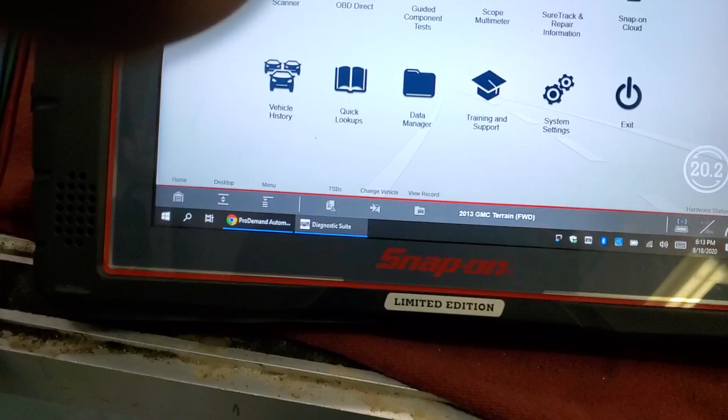Let's go ahead and get into scope. 4-channel, we got all our leads in. All our grounds are stacked. The other side is grounded to a jumper wire to the negative.

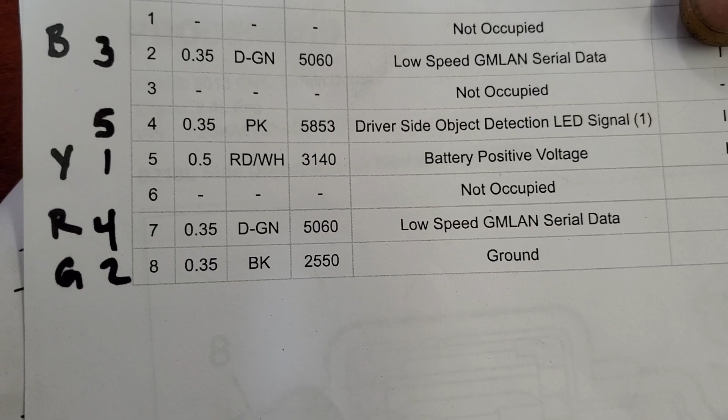So we're going to set this up. Yellow is going to be our battery positive voltage. Green will be ground, and blue will be low speed can, high or low, doesn't really matter, and then the red trace will be the other low speed can.

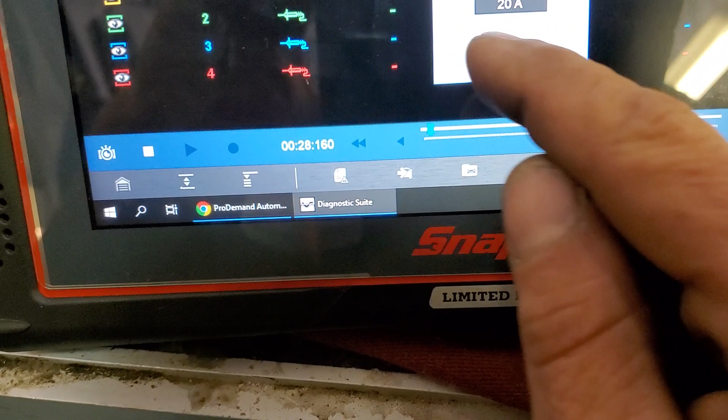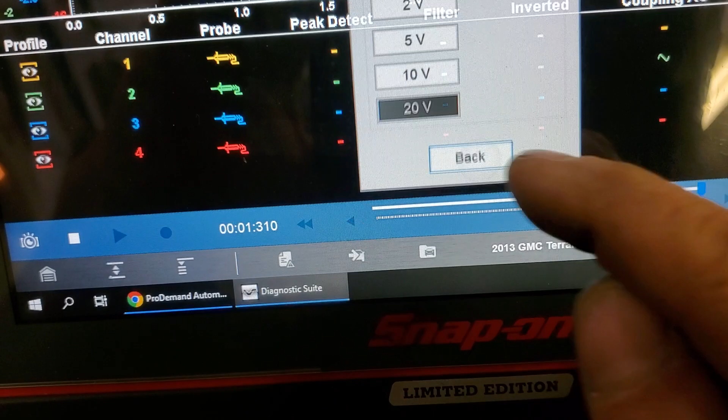So let me hook these up. We're going to want to change our probes all to volts DC. We're going to go to a 5 millisecond screen, scale 20 volts, 10 volts, we'll go 20 volts on all of them to start. 5 millisecond screen. Alright, let me hook them up.

Keys on, engines off. You can see all the numbers - now that's why I number them. So I'm just going to hook up all my leads.

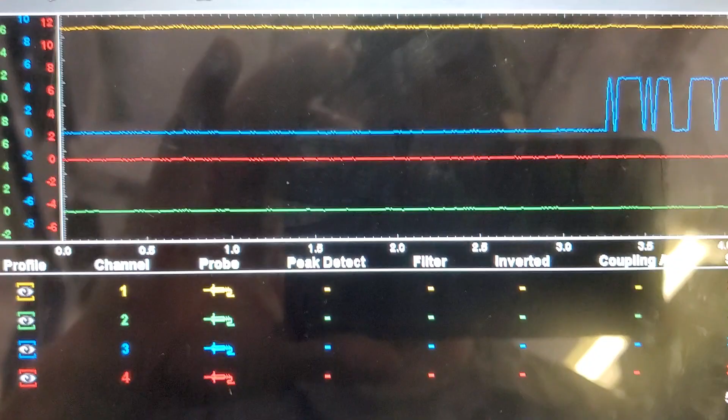Alright, to get the vehicle running, and you're going to see that blue, which is our low speed serial data, has got a signal, but our red, which is our other one for the low speed, we got no signal, and we're unplugged right now. Ground is at 0 volts.

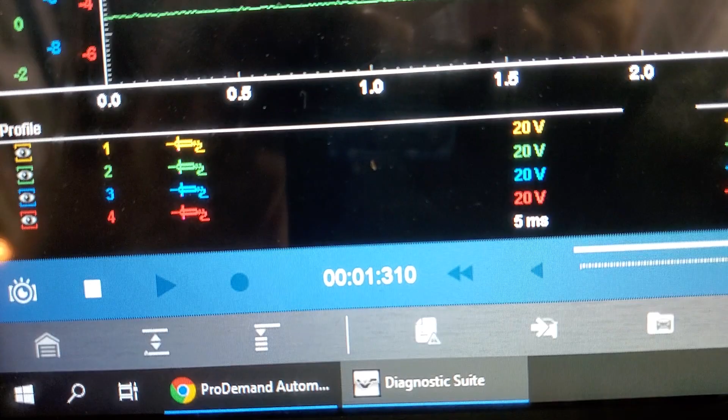If we want to look at voltage, you'll see that ground is at about 40 millivolts. Our battery feed is at 14.7, 14.8, and then our red trace is fixed low.

So we have no - now if you look, let me pause this. We've got a 0 to 5 volt CAN signal, low speed CAN signal, but nothing on the red. And I'm unplugged, so let me plug it in.

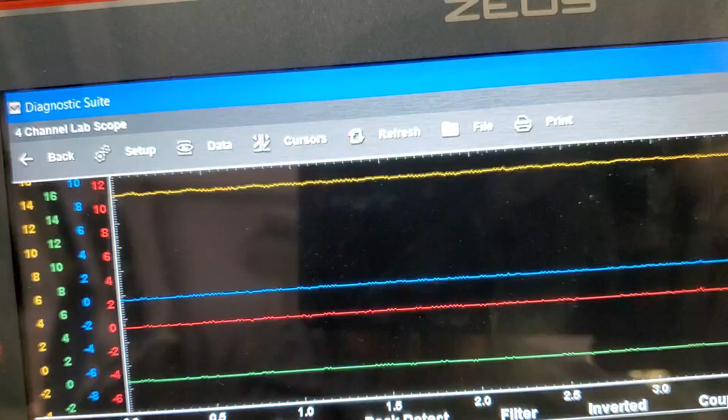Alright, plugged in. Now you can see with it plugged in, the red is 0 to 5, and it mimics the other one.

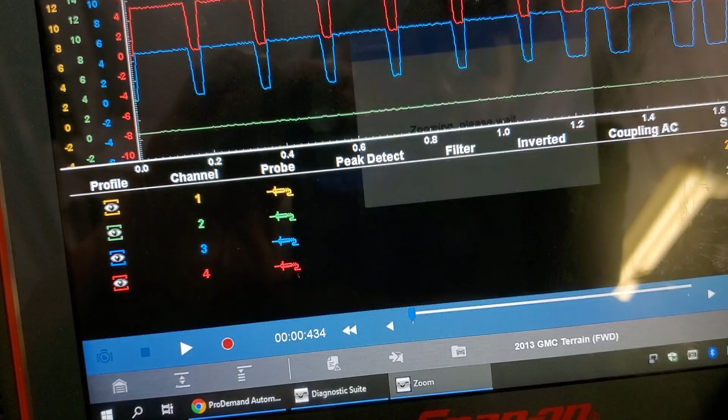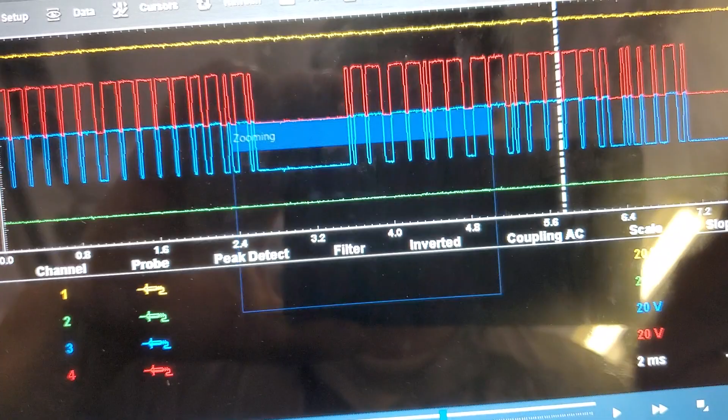Now if I want detail on this, we can drop her down to a 2 millisecond screen, hit stop, and then zoom. And wherever this dotted line is on the waveform is where it'll zoom in, okay? So if I want to zoom in over here, okay? So you can see they mimic one another.

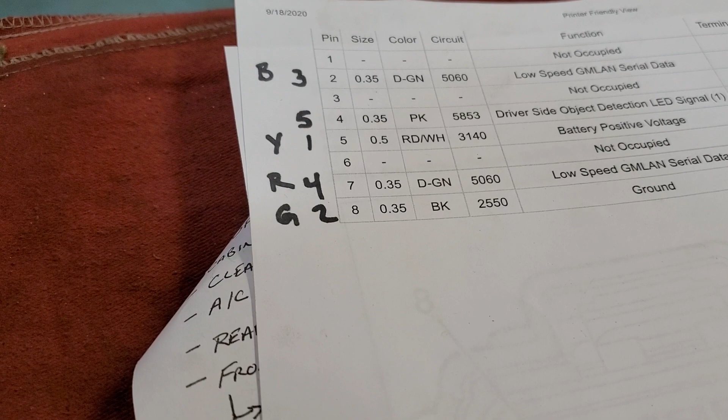So the red must be the communication line back from the module, I'd imagine. Yeah, I'm gonna have to look at that a little closer. So let's look at - where'd my wiring diagram go?

Alright guys, this makes sense now. We're on this one, this is our red trace. It's dark green on pin 7. I have no signal unplugged, but I have a signal plugged in. Now,

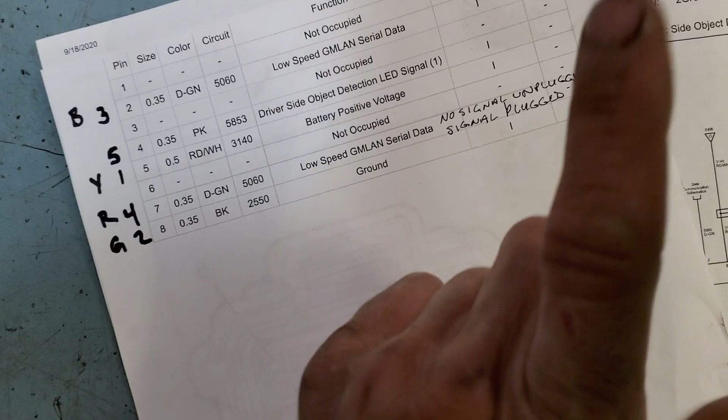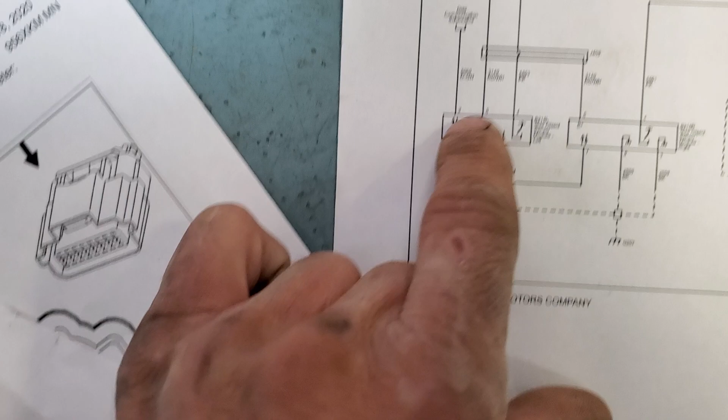if you look at the wiring diagram, you'll see them two-way arrows. This right module, the right module they talk back and forth, okay, between the left and the right, and then the left one is responsible for sending out the signal.

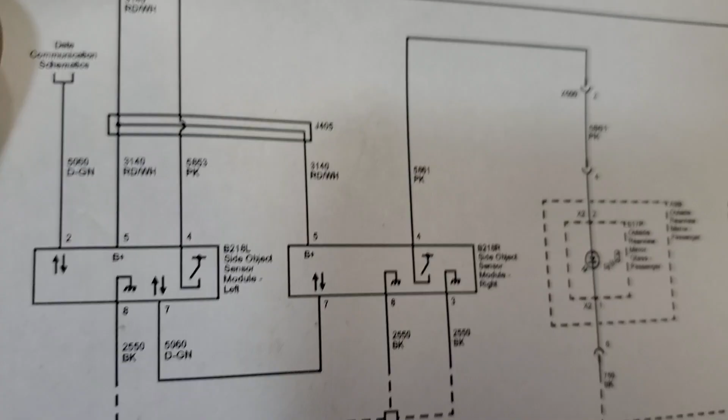Interesting. So that is very interesting. So I'm going to unplug the right side module and see what happens. Okay, right side's unplugged.

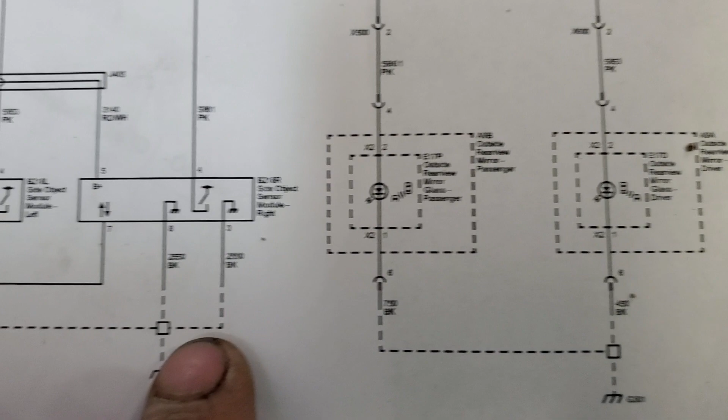So let's look at this again. So if I unplug this side, it means I should have no comm for my right module. And I have no ground to it, I have no power to it on the red-white. No signal from that pink, for the mirror, it's not communicating with the left one.

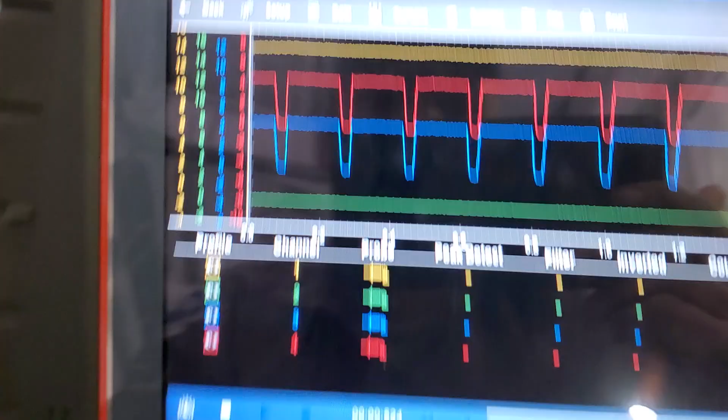So we're still plugged in on our left. Okay, so the left is the one creating those signals. Now let's disconnect it, the left one.

So the red trace is the signal. Again, red is this one. This module, the left one is talking. The right one is not.

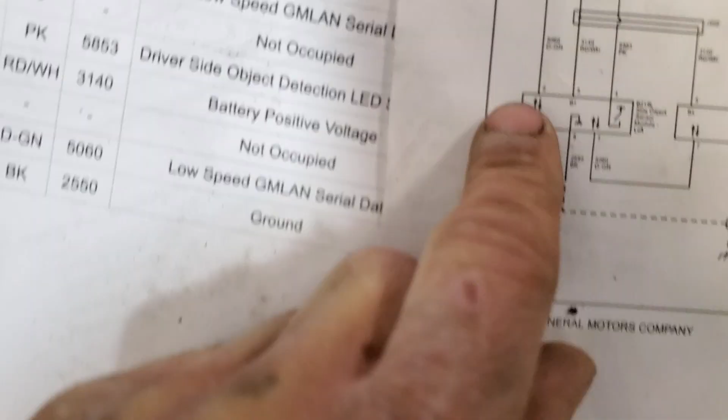Because if I plug the right one back in, I should have a signal, you would think, right? And I've got a signal on the network. That's this one. I've got signal coming out.

That goes to the communication network, so we'd have to pull the schematic. But if I plug in the right one, and we're disconnected here, and this is a two-way street, you would sure as hell think my red one should have a signal on it, right?

No. There it came back. So maybe I wasn't making a good connection before, so okay, there, it stopped communicating. It communicated as soon as I plugged it in, and then it shut itself down. I wonder if that's because there's a fault.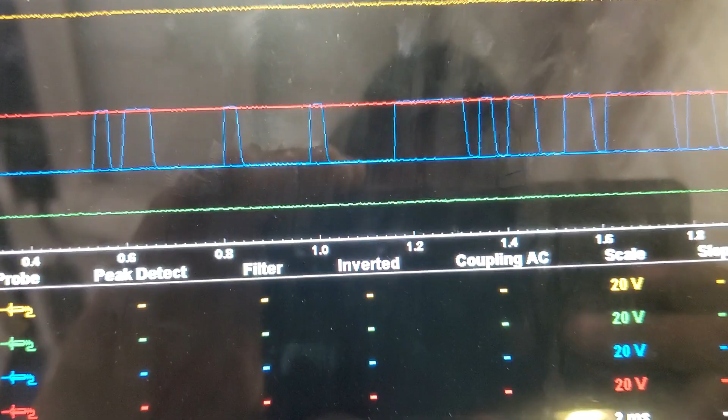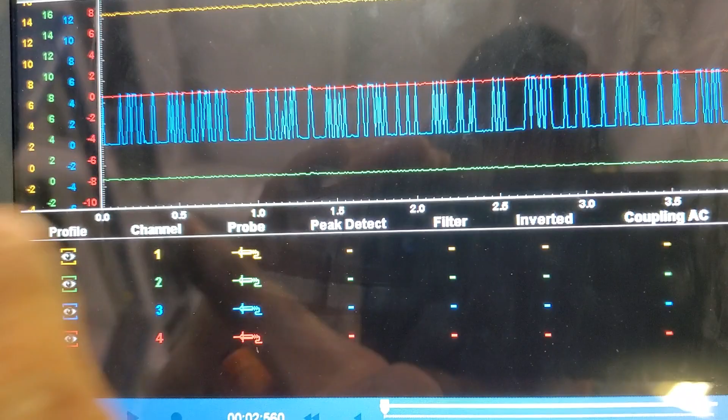Let me increase this time base so we can see more. There. So now we can see this is the network. Again, we're tied in on the right side, but we're unplugged from the left sensor or module. So let me unplug and replug in the right.

Alright guys, I got it unplugged right now. Now watch when I plug it in. Again, we're on the right module with the left one unplugged. Watch the red trace, I'm gonna plug it in.

Remember, we weren't getting codes for the right one. Here we go, come on. Oh, this is hard to do. There we go, there it is. Signal.

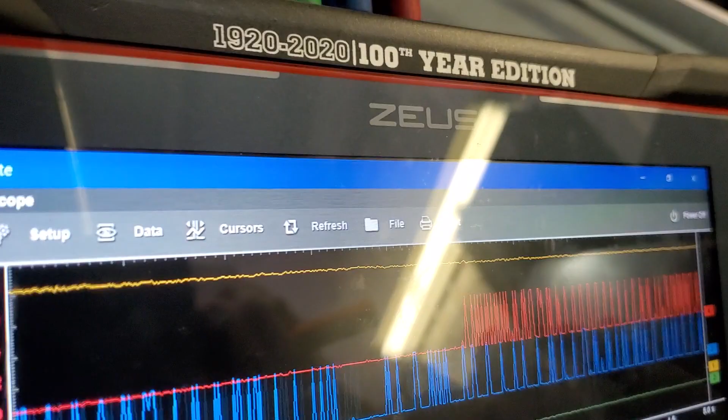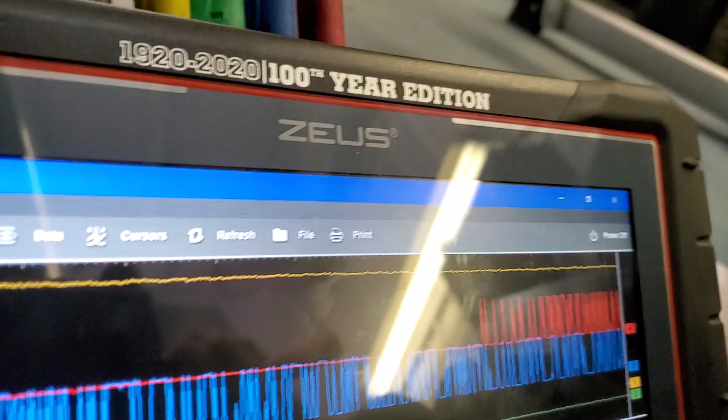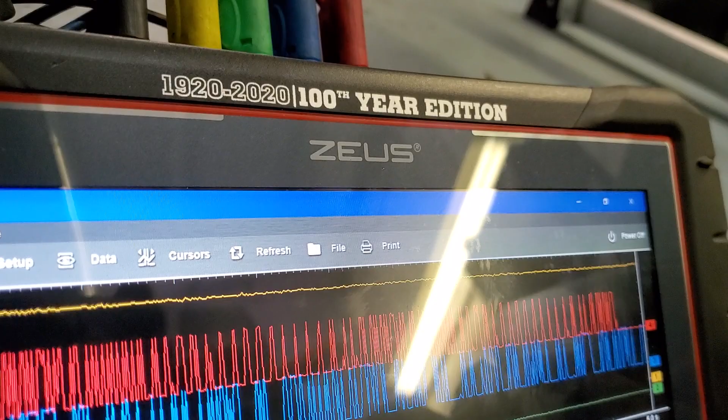Unplugged. Plugged in. No, let's watch it. So, there you go, I don't know what it just did, but again, the right side is our known good. Now let's watch the left one.

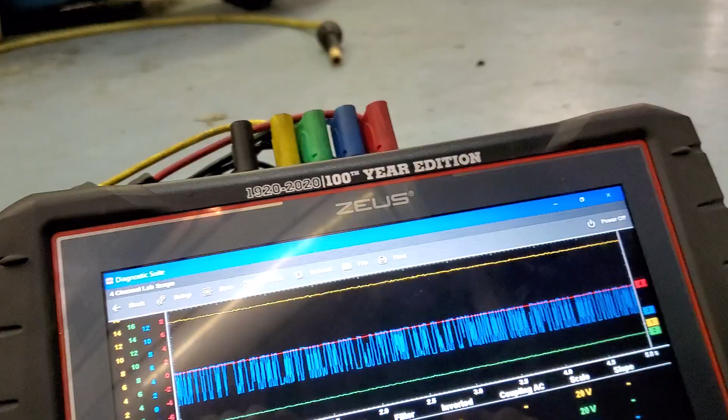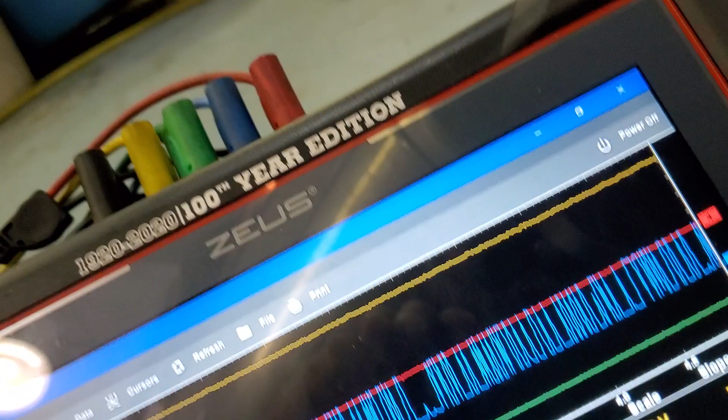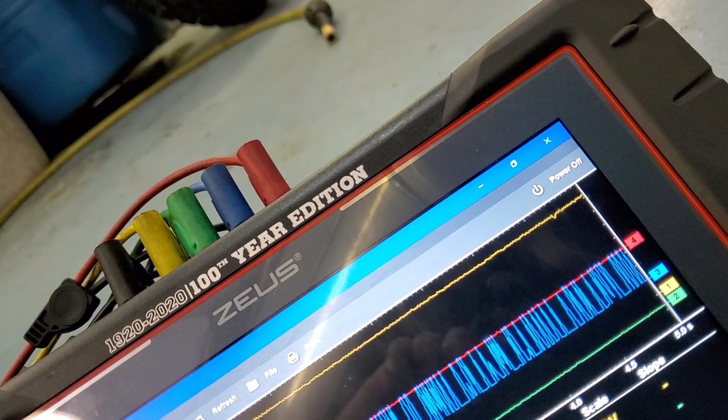Now, I would assume they should be the same. Okay, here we go. Let's see if I can get a hold of it. Oh, come on. Okay, yeah, we're unplugged. So I'm going to plug it in, and it should do the same thing the right one did: talk for a little bit and then stop talking. I don't know if that's like a health check.

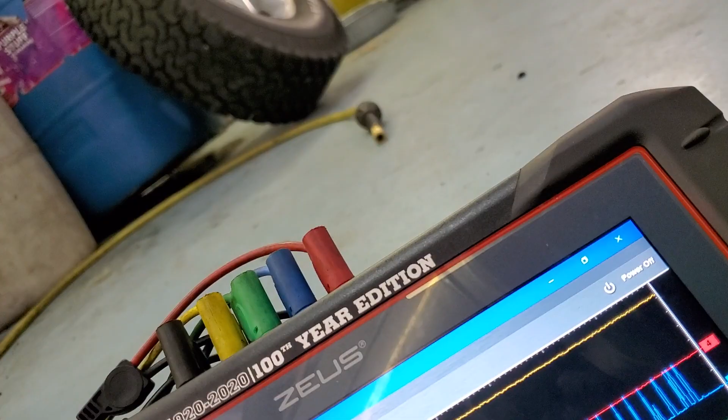Ignore that power feed that just dropped out on the yellow. That was me just bumping the lead. Oh my goodness. Hold on. Oh, this is freaking hard, guys. Ugh. I can barely reach it. Oh, come on. Come on. There. Alright. It's plugged in.

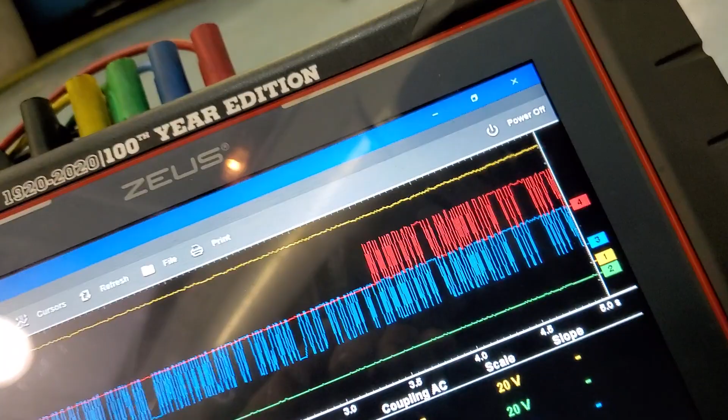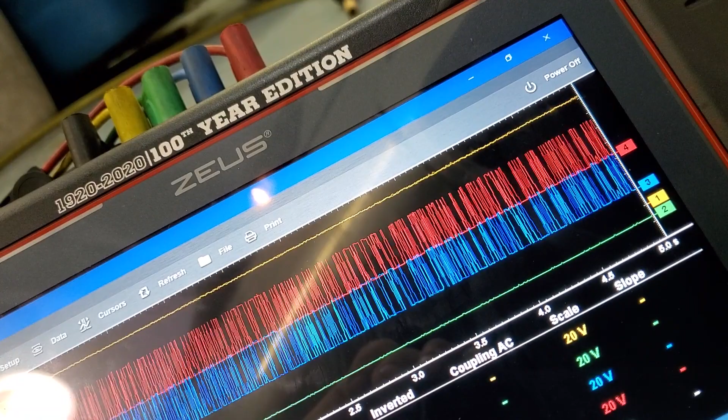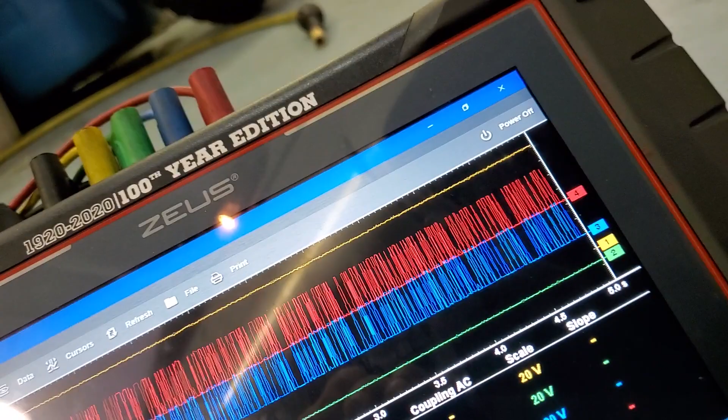Let's watch it. I don't know how long the other one took, but it didn't take very long, and it stopped communicating on the red. And there you go. Not acting the same way. I don't know. Maybe that's its way of saying, hey, I'm alive, I'm good. And then when it goes low and just stays low, it means it's good. And then when it has problems, it starts talking about it. Because you can see it's still talking, and it's mimicking the network.

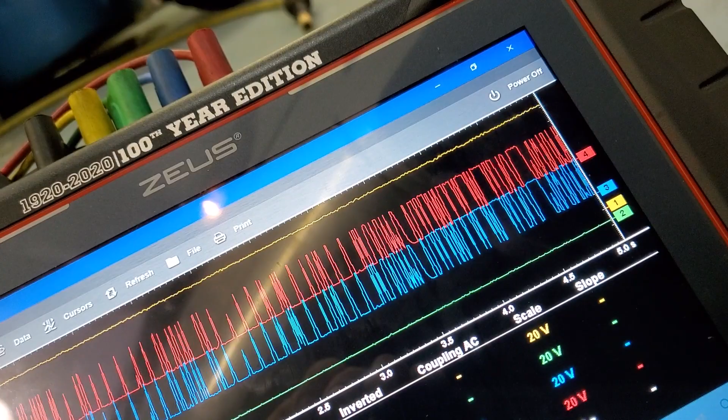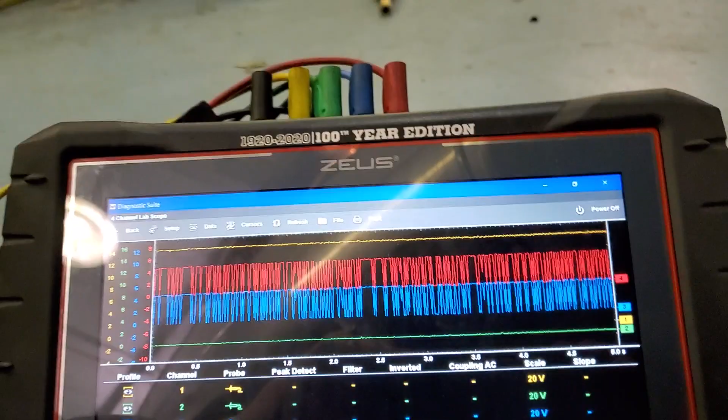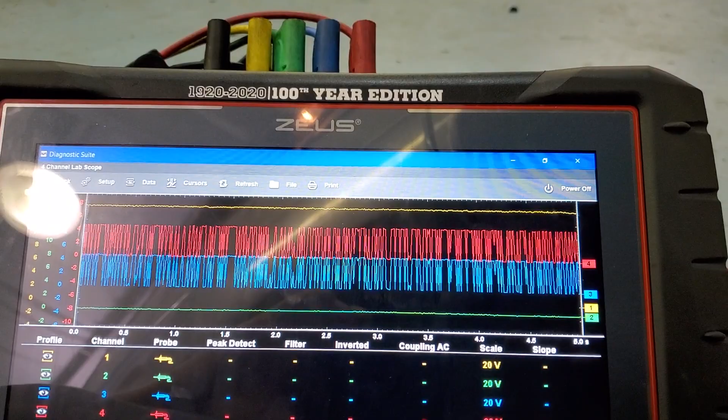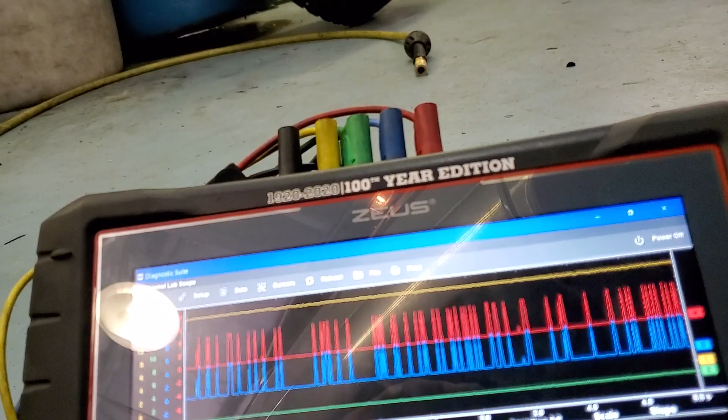Okay, so we're pretty much done, guys, but I'm gonna load test this. I'm gonna do a voltage drop test on the ground and on the power at the module here with my meter, and we're just gonna hook one side of the meter to battery positive and the other side to the positive piercing probe that we have in there. Same thing for the ground. We'll go ground to ground and just read our difference, and we're pretty much done, guys. I want to check that.

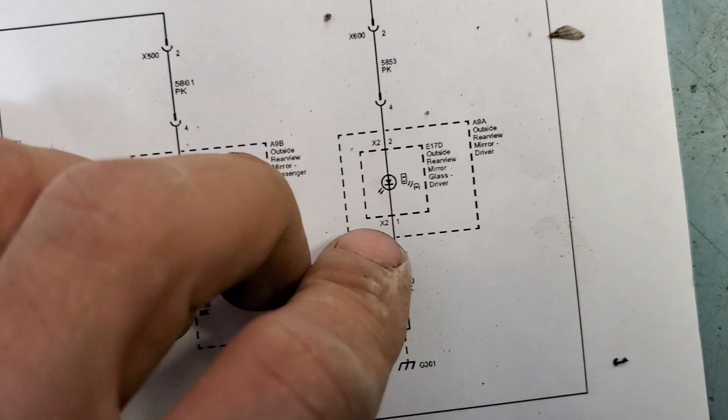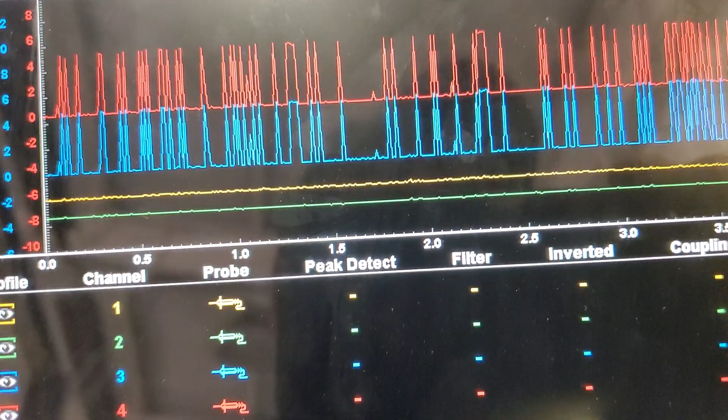I want to check this pink. I don't know. That must be the signal to the outside rear view mirror. Okay, so that's the signal to the mirror. So let's check that. Let's put the yellow trace on that real quick. All right, yellow trace is on. Now I don't know what that is supposed to look like, so let me go do something to see if we can see a change.

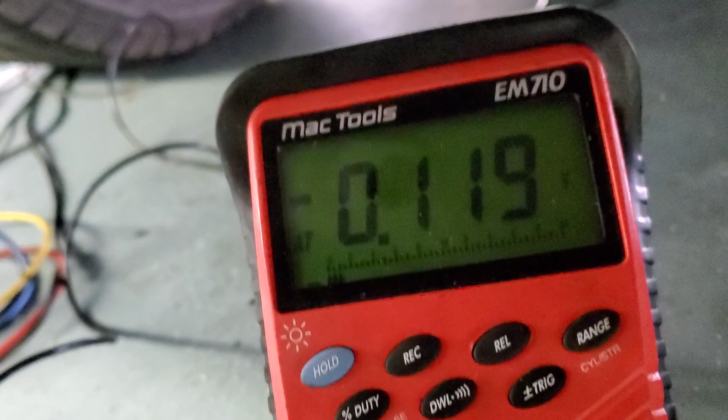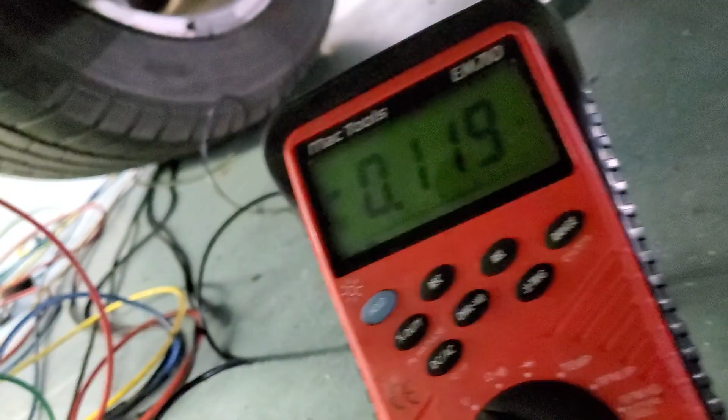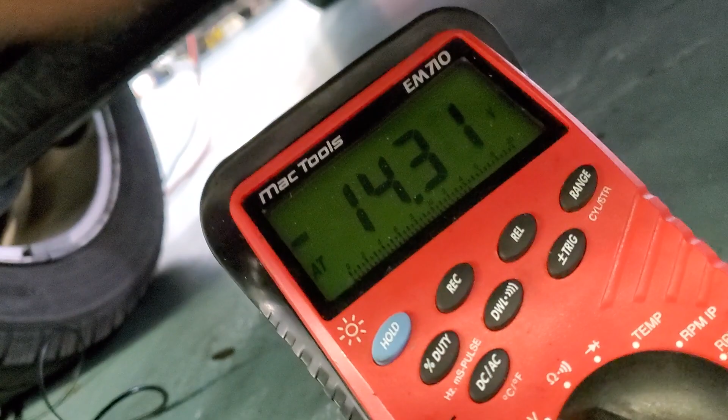All right, I'm on the left module. It's plugged in and we're running, and I'm doing a voltage drop on the power feed. So 119 millivolts on the voltage drop on the power feed to the left module. Not worried about it. Let's do the ground quick. Alright, I'm hooked to the ground, and you can see we're getting about 14.3 volts. That's because my positive side, or my red, is hooked to the ground at the sensor, and I gotta switch my black to battery ground to do a voltage drop, because again, difference in potential, right? So of course we're gonna read battery voltage. Let me go ahead and hook up to ground, and there you go, 40 millivolts.

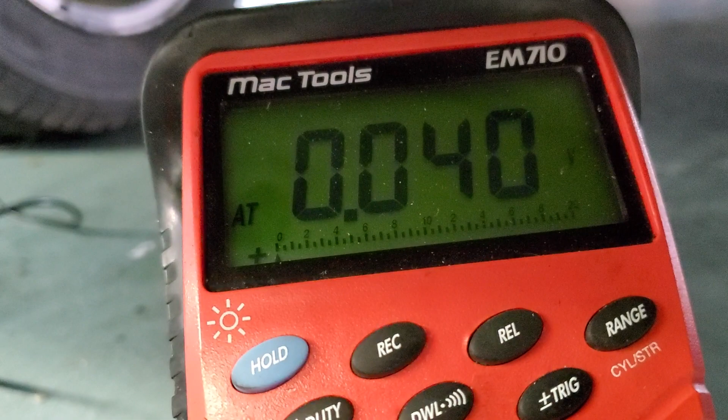Alright, I'm a little concerned about that power feed, but there again, I'm running off those jumper cables all the way to battery, and I'm actually at the fuse box positive side, or positive post. So 119 millivolt drop. I'm not too concerned about the power or the ground to that sensor.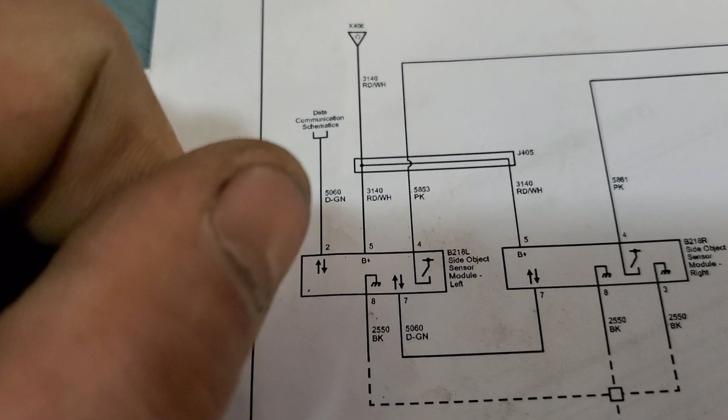So now I want to check this. Which one was it? This sensor signal on the right side for the mirror. And I just want to see what that looks like, because if you remember, right on the scope we were getting on this pink, the signal wasn't present. So I don't know if that's normal. Maybe you gotta drive it to get it to do that. So let's check that. So there you go, guys. It's the same on the right side. I'd imagine you gotta drive this to get a signal out of it, because

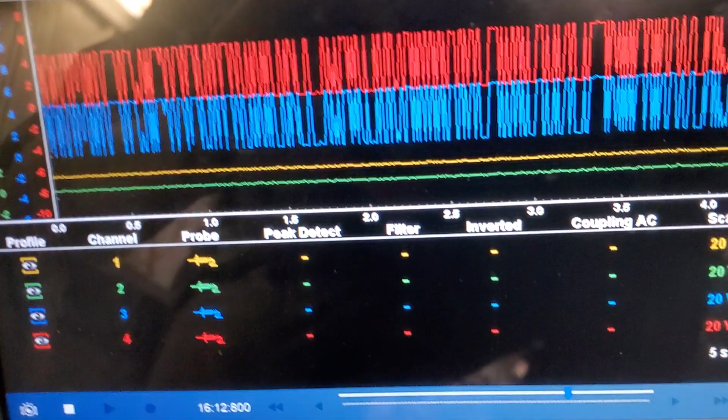I'm gonna have somebody stand by the mirror, in front of it or something, and see if that makes a difference. I just want to see if it produces. Yeah, I don't know. You probably got to drive it. All right, I'm wrapping it up right there.

I called the module. I don't feel bad about it one bit, because I know I went into it a lot more in depth than most guys probably would have. So it's getting the module. We checked everything we can. So the last thing I did, since this is going to be a warranty claim and it's going to be a few weeks probably before we even get it approved and whatnot, I put liquid electrical tape on my little holes. I'm letting that dry, and then I'll wrap the harness up decent, plug everything back in, and we'll ship her down the road until we get the parts.

As far as the programming is concerned, I'm not too worried about it. We're going to get the module, we'll plug her in. I'll do that configuration again for the park assist module, for the CAN bus, I think it was. I have a feeling we'll be all right. And if we do have to send it off to get flashed or programmed, we'll attack that when that time comes, because I'm just not seeing anything that indicates that it needs to be programmed.